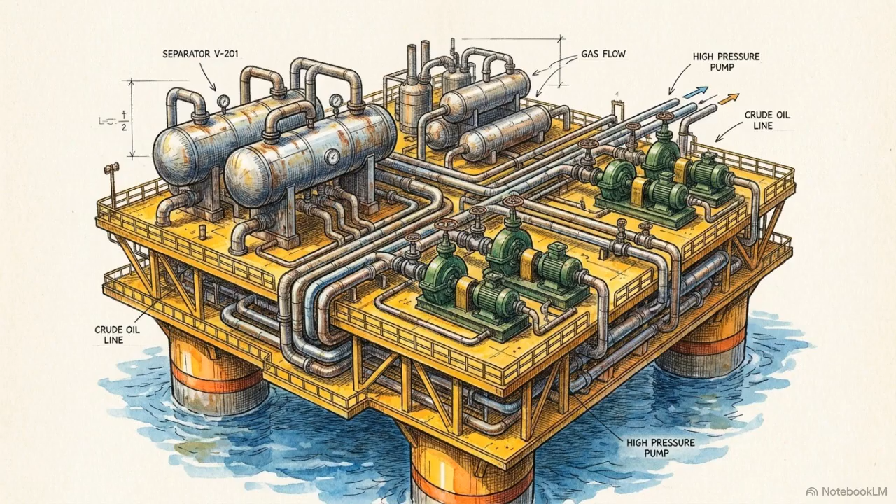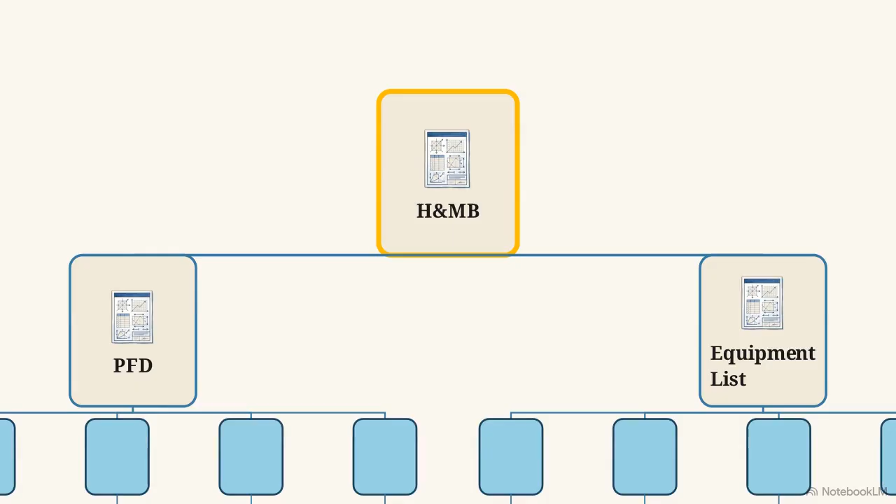The entire physical mass of an offshore platform, every valve, separator, and pump, traces back to a single thermodynamic number in a process simulation. That number dictates the heat and material balance document, the H&MB. Because it defines how the reservoir fluid behaves, the H&MB acts as the parent document for all downstream engineering. Every piece of physical steel is the end result of that digital number. When information is late or incorrect in the paper world, it guarantees a multi-million-dollar collapse in the steel world.

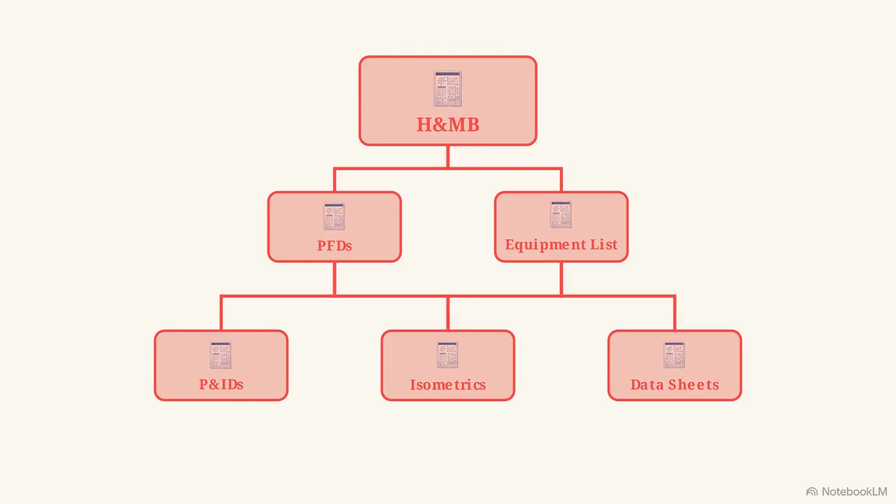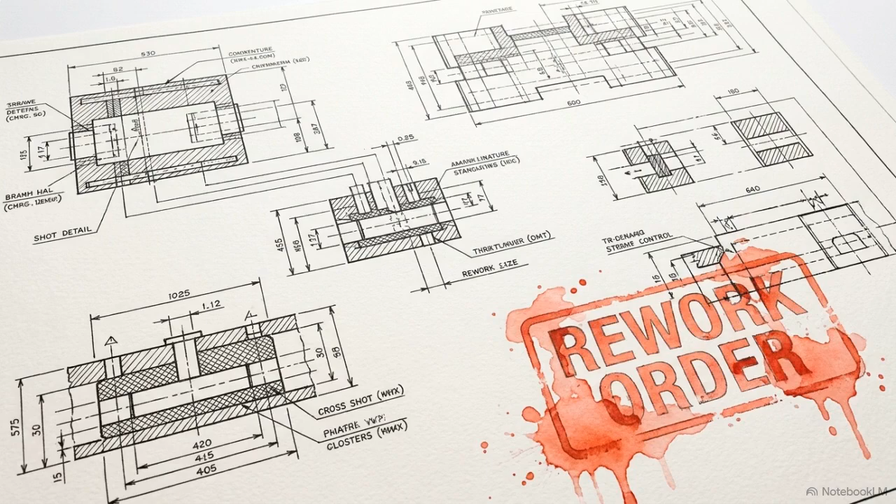Because the H&MB is a parent document, altering it triggers an immediate cascade through the design. Revise a single flow rate, and you force revisions across your piping and instrumentation diagrams, resize downstream pumps, and invalidate purchase orders. To prevent broken designs from reaching the yard, engineering drawings must earn an Issue for Construction, or IFC, stamp. This stamp has 3 non-negotiable prerequisites. All safety hazard actions must be closed, final vendor data must be incorporated, and pressure safety valve sizing must be confirmed. Without all 3, an IFC stamp is worthless. You are simply issuing a rework order to the yard.

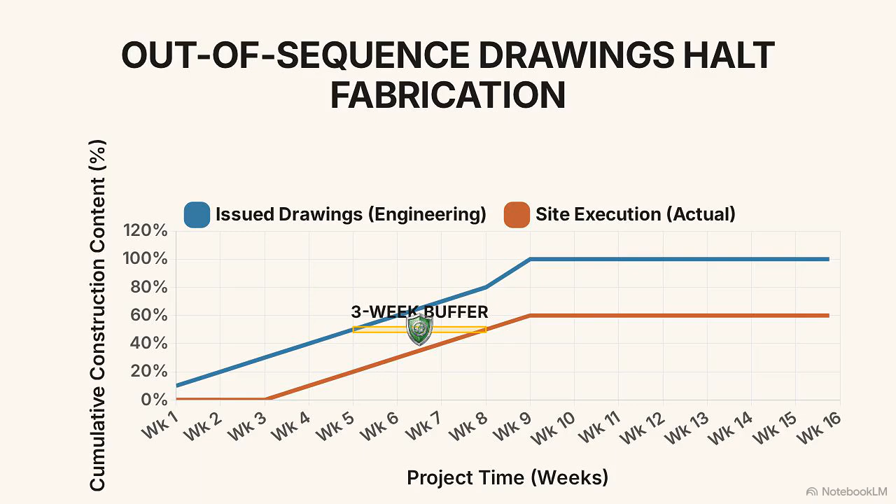This chart shows the work front curve, the tool used to track whether engineering is successfully feeding the site. The blue line represents cumulative construction content on issued drawings, and the orange line represents actual site completion. The gap between them is your sequence buffer. To avoid stop-start fabrication and idle welders, you must maintain a strict 3-week minimum gap between issuing a drawing and the yard executing that work. If engineering reports 100% complete, but the drawings were issued in the wrong order, this gap collapses to 0. The yard is now surrounded by finished blueprints, yet entirely starved of actionable work. Because sequence dictates survival, not percentage complete.

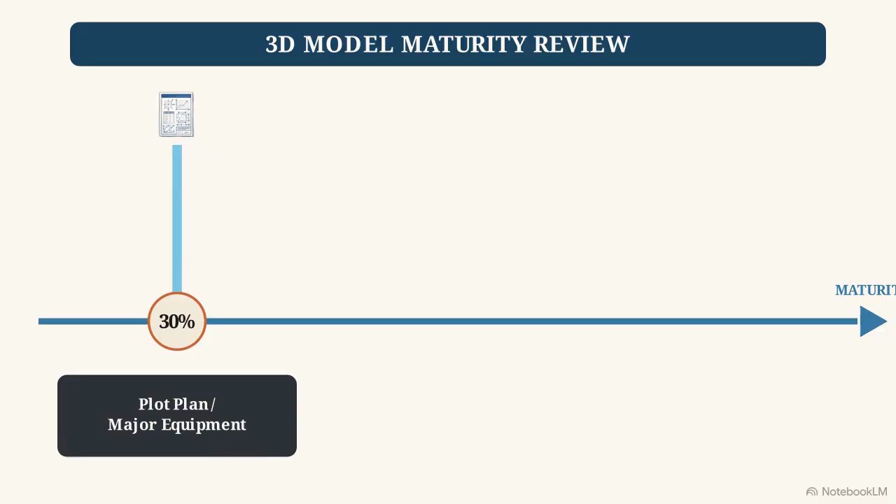Sequence is also enforced through the 3D model, reviewed at 30, 60, and 90% maturity gates. If a client requests a new compressor skid at the 30% plot plan stage, you are simply moving digital blocks. Raise that exact same request at the 90% clash detection stage, and you are stripping out and rerouting structural steel, piping, and cable trays at 10 times the cost.

As the design matures, you must also defend the physical buoyancy of the asset. A platform has a fixed total displacement. Every kilogram of lightship weight growth, the structural steel and equipment you add during design, is a kilogram of variable design load, or cargo capacity, that the operator permanently loses at sea. Engineering success is measured by how flawlessly it manages physical constraints and sequences data to feed the yard, rather than how fast it finishes the document register.

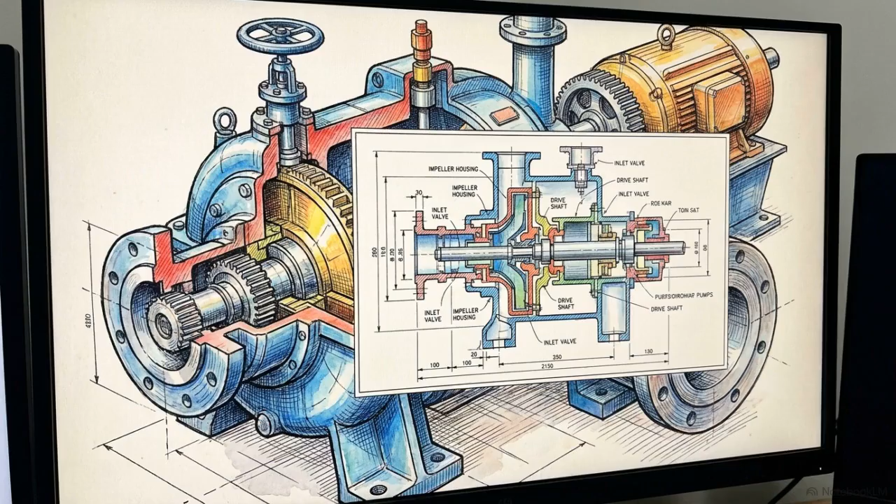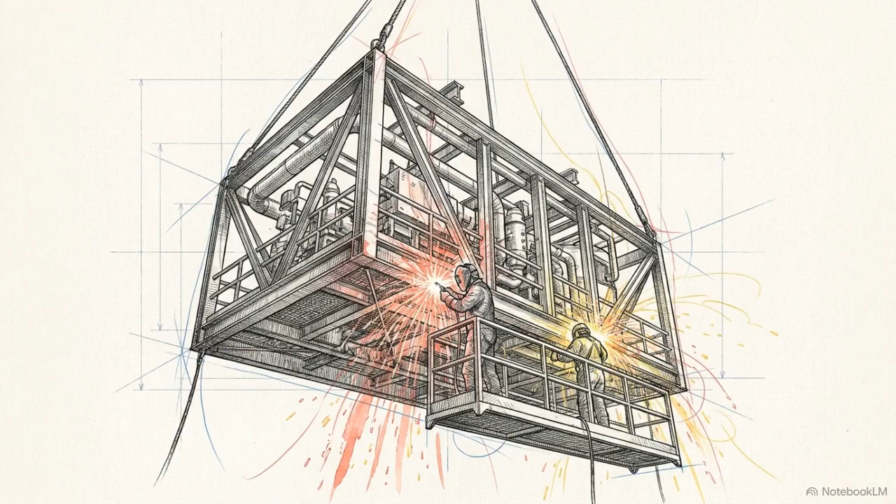Inside the yard, the schedule is dictated by the availability of heavy lift cranes. If a module is 97% complete and your scheduled crane window opens, you lift the module immediately and finish the final 3% in the air. You cannot negotiate a missed crane slot.

To monitor the health of this operation, you must watch the leading indicators. This graph tracks the manpower ramp-up curve. The steep line is the planned requirement for certified welders and tradesmen. The lower line is the actual headcount the yard was able to mobilize.

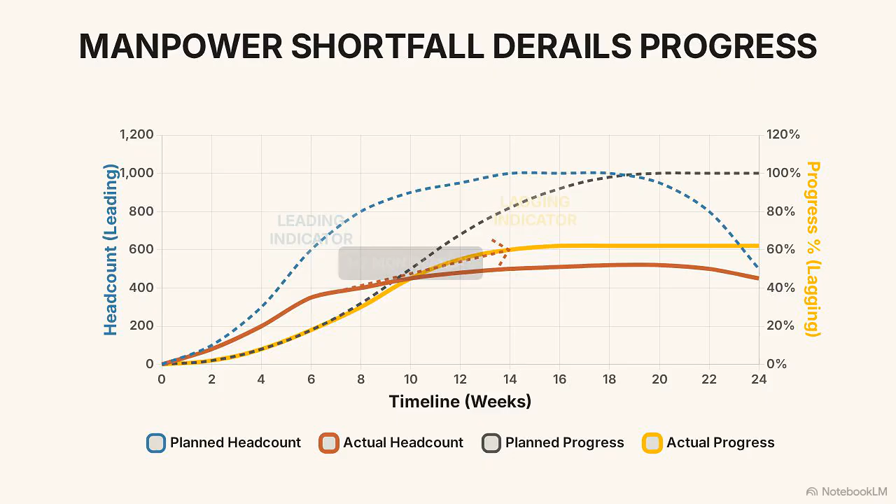When actual manpower lags behind the plan today, your overall project progress S-curve flatlines roughly 1 to 2 months later. By the time you see the progress drop, the recovery window has already closed.

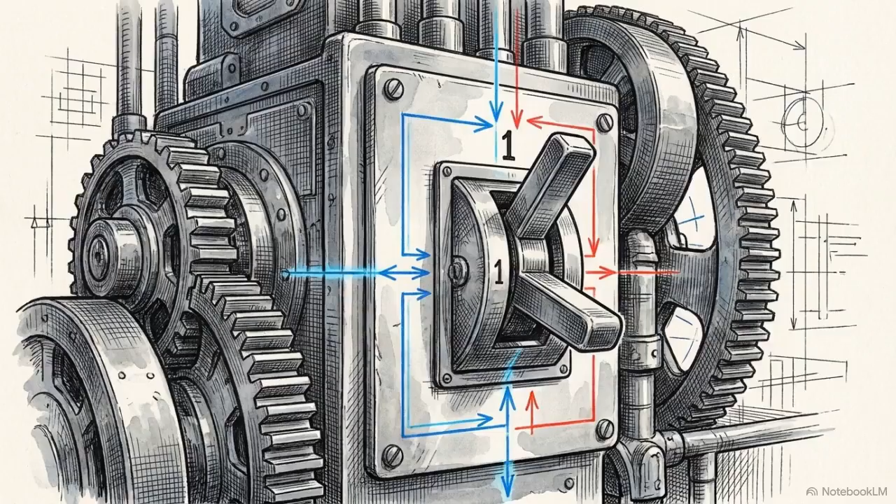As the yard finishes steelwork, the project transitions to mechanical completion. This status is strictly binary. If a system is 99.5% complete, but still has open A-category punch items, it is legally incomplete and will fail the client handover audit. You cannot bluff your way out of the steel world. Crane availability, welder headcounts, and binary completion checklists hold the schedule hostage to physical reality.

When those physical realities cause schedule delays, the survival of the executing company depends on the contract model. Under a lump sum turnkey contract, the contractor pays for every overrun out of their own margin. Under a reimbursable model, the owner absorbs the risk. Defending that margin requires intense discipline regarding scope boundaries.

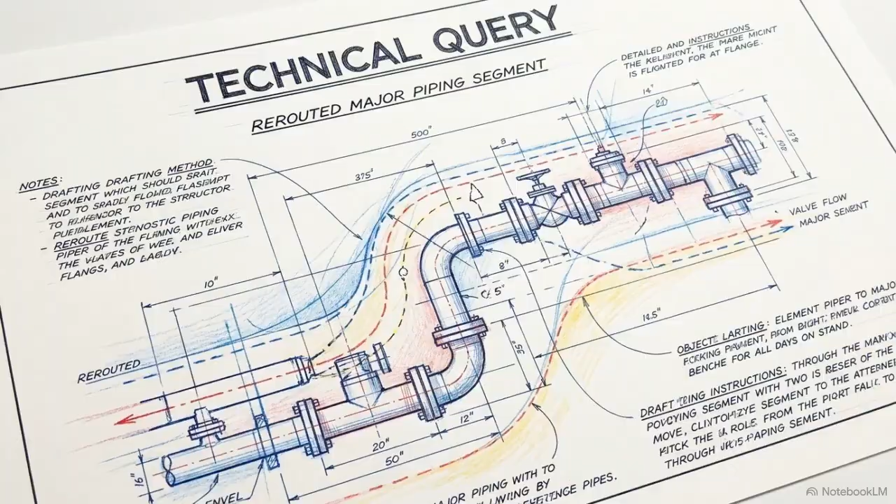If a client submits a technical query that provides a direct instruction to alter a design, that document is legally a change order, regardless of what the header says. Project directors must apply one overriding principle: never accept unquantified liabilities. If you do not fully understand the local laws, taxes, and import duties of the execution country, you refuse to price them. When commercial and engineering discipline fails, the results are catastrophic.

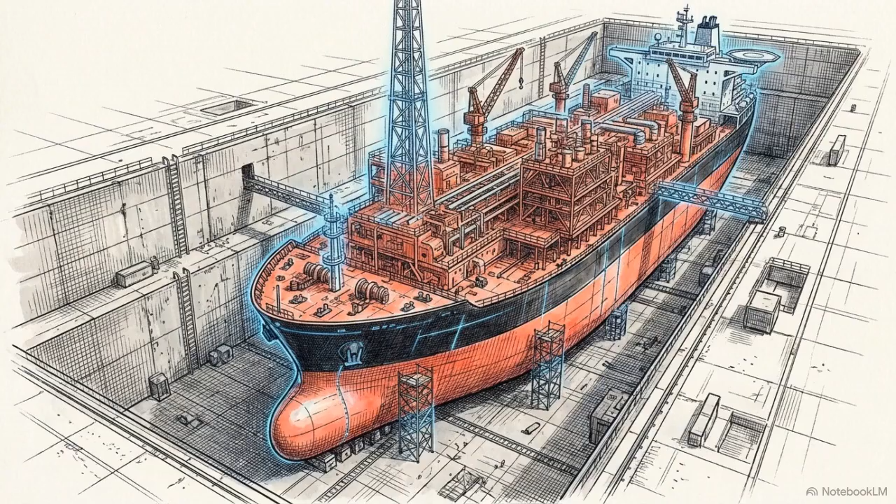This is the hull of the Jurasol FPSO sitting in a dry dock in Korea. The construction of this multi-billion-dollar asset was paralyzed because engineering failed to deliver a single set of missing data: the topsides hull reactions. Without those numbers, the steel world froze. Recovering a stalled project of this scale requires emergency medicine.

For Jurasol, leadership abandoned standard reporting and restructured the commercial reality. They aligned subcontractors using target price plus incentive schemes and relocated integration to a high-productivity yard to buy back time. When execution stalls, demanding harder work achieves nothing. You stabilize the project by deploying contract levers and restructuring the financial incentives of every participant.

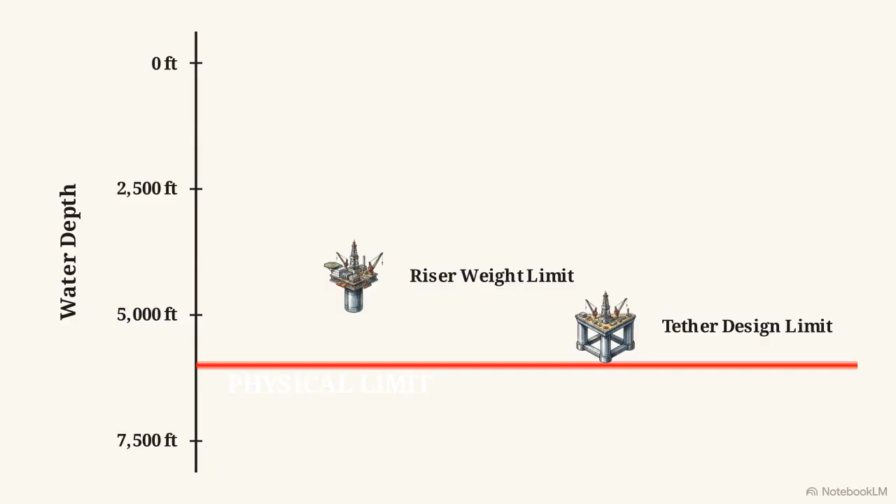Tension leg platforms and spars have hard physical depth limits due to tether designs and riser weights. Physics overrules both the shape of the reservoir and the preferences of the business. If a proposed concept requires an unprofitably high break-even oil price, the executives must reject the architecture entirely. You cannot close a massive structural economic gap by simply squeezing execution efficiency.

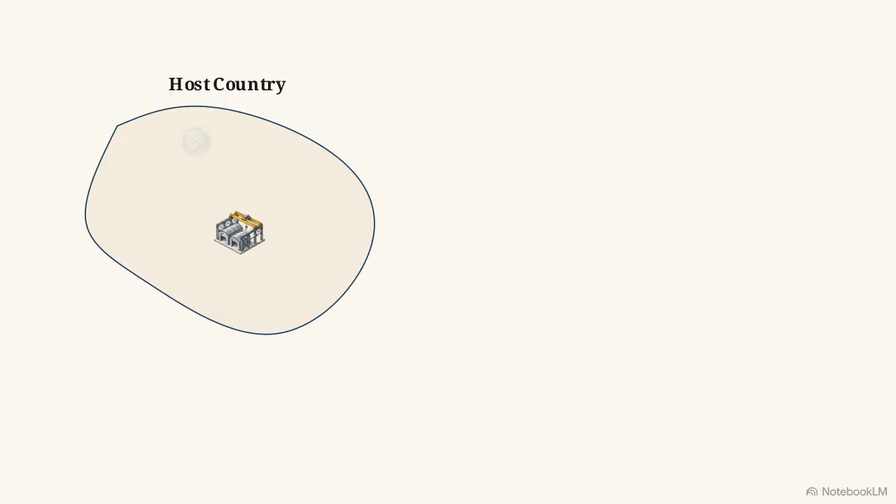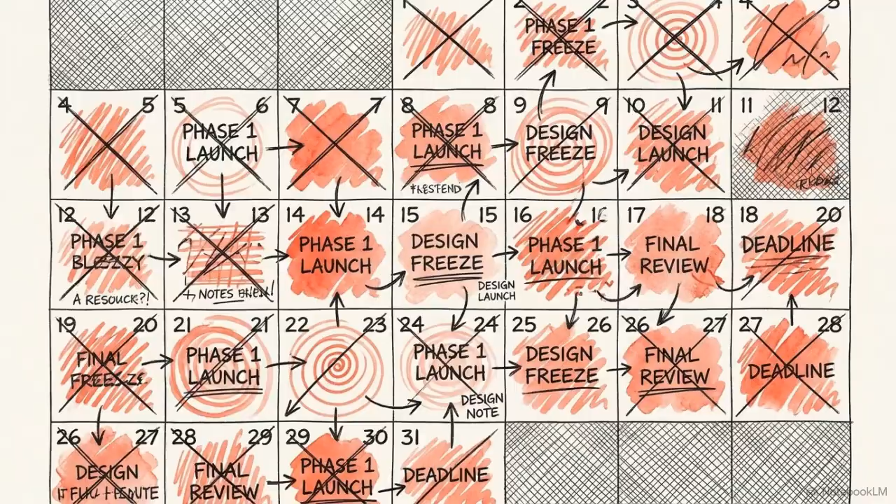To protect the firm from signing toxic contracts, executives mandate cold eye reviews on all high-value tenders. External experts ruthlessly audit the bid, forcing the optimistic bid team to prove their productivity assumptions with hard data rather than relying on internal bias. These reviewers pay specific attention to local content requirements. Mandating the use of indigenous labor and fabrication facilities increases fixed project costs while simultaneously restricting the available resource pool. This restriction introduces severe, unpriceable schedule unpredictability.

Executive governance is the final failsafe. Sanctioning a physically flawed concept or an artificially optimistic bid guarantees a failure that no amount of brilliant yard execution can reverse. Delivering a viable concept requires solving the most common point of failure, the corporate org chart. When engineering, procurement, and project management sit in separate departments, simple technical questions mutate into multi-day email chains. These rigid internal silos cause more delays than any external supplier.

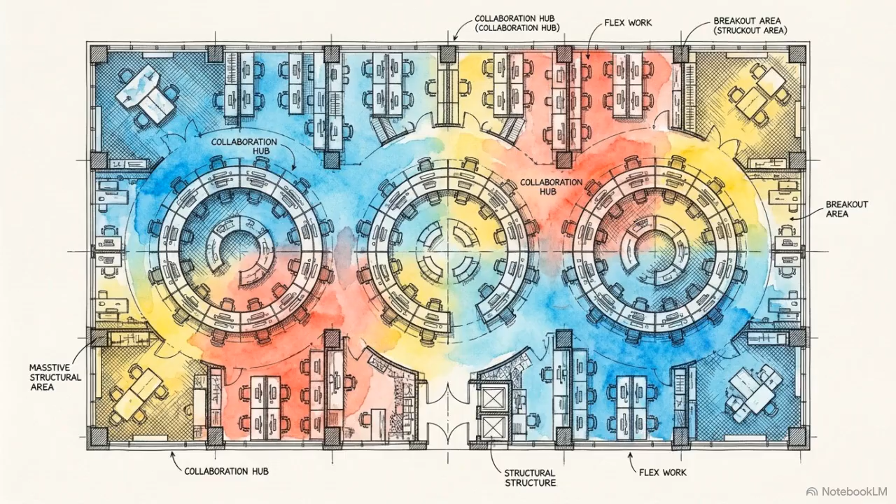The structural cure is the integrated task force. By physically co-locating all disciplines onto a single floor under one project manager, you dissolve the departmental boundary limits. Bureaucratic emails become immediate cross-desk conversations. Co-location collapses decision latency, rather than simply forcing the team to work harder. When decisions happen in hours instead of weeks, you maintain the speed required to protect your 3-week sequence buffer at the yard.

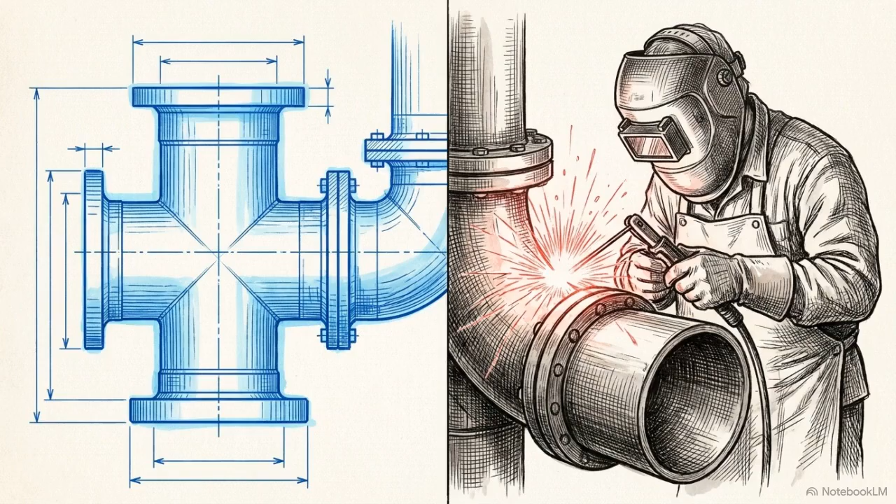This is the complete EPCI architecture. You sequence the digital paper world to feed the physical constraints of the yard. You enforce the contract commercially to survive delays, and you apply executive rigor to select concepts grounded in physical reality. When you align the organization and protect the flow of data to the steel world, the bleeding stops. The heavy lifts execute on schedule, the binary punch lists clear, and the asset sails away.